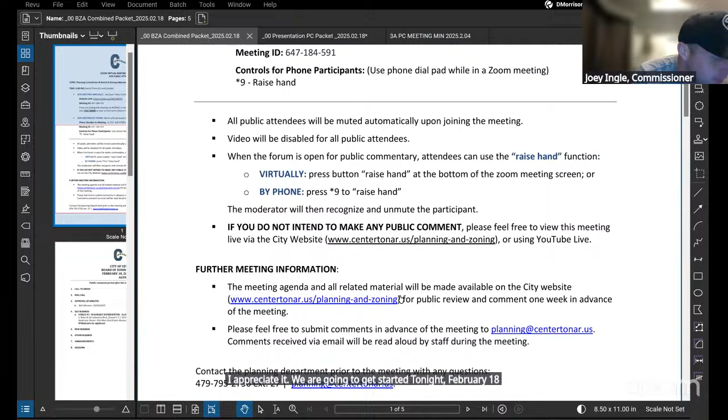We are going to get started tonight, February 18th, with a Board of Zoning Adjustment meeting. I'm going to call that to order, and if we could start with the roll call.

Craig Langford, here. Joey Ingle, here. Devin Murphy. Brandon Swoboda, here. Tony Davis, here. Ben Lewis, here. John Sessoms, I'm here. And Jeff Seyfarth is not here tonight. Did I call everyone? We're good, I believe so. Thank you, okay.

Tonight's only item is variance 2501. We're revisiting the Walmart Supercenter parking space reduction from 786 to 769. And if y'all can remind me, did we table this last time?

Yes, we tabled that. Joey, do you want to approve the minutes for the last meeting? I motion to approve the minutes from last meeting, BZA February 25th. Second. Got a motion and a second. I also motion to resurface and untable variance 2501 Walmart Supercenter.

Well, hold on one second, John, let me ask a question before we do that. It says it's withdrawn, is that correct? Yes, it's withdrawn. Oh okay, all right, then we'll leave it where it's at then. No need. Okay, so with that, no new business, no other business, no announcements for the BZA.

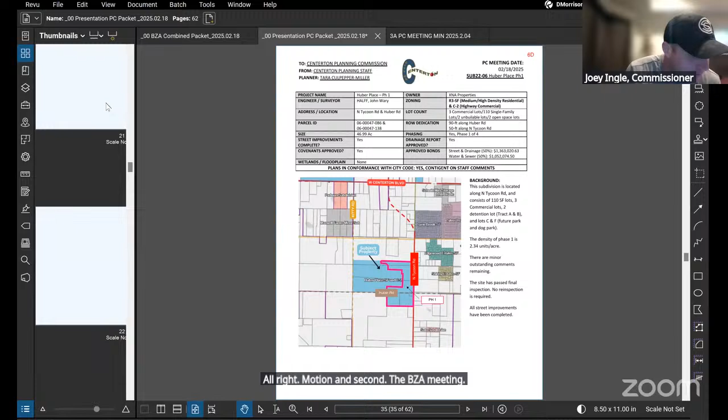I guess with that, I'll take a motion to adjourn. Motion to adjourn. Second. All right, motion and a second, the BZA meeting is now adjourned. We're gonna roll right into the planning commission meeting for February 18th.

I'm gonna start with a roll call.

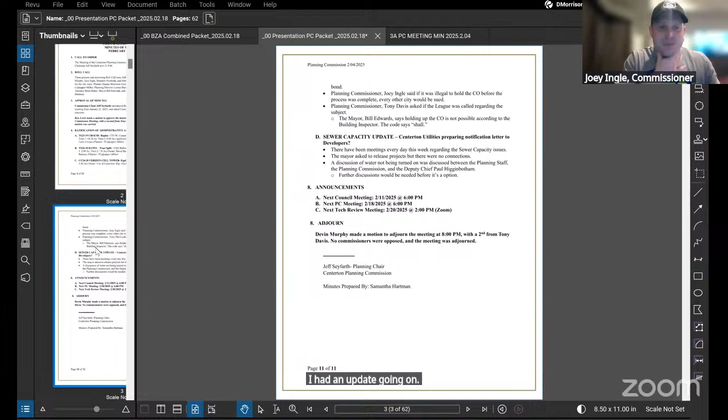If I could interrupt for a minute, Devin's now on too. Awesome, thanks for joining. I had an update going on. Of course, we haven't had a Zoom call in a couple years.

All right, Devin, we're on item 4 on the planning commission agenda. The BZA item was withdrawn. So number 4 is the ratification of administrative approvals. There's a tract split 2412 steel replat on Seba and Main.

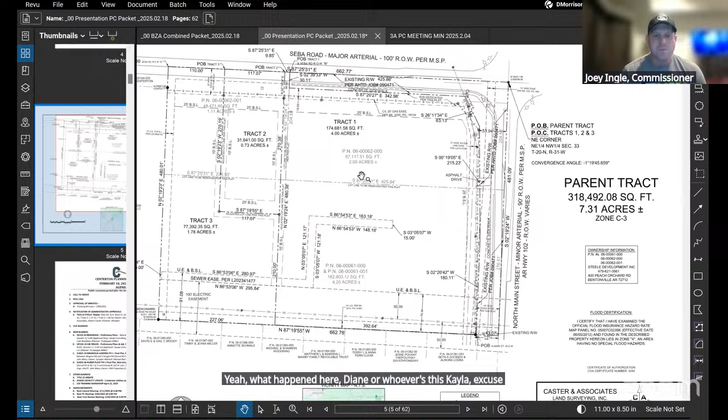What happened here, Diane, or whoever's this is? Kayla, excuse me. So there was a tract split last year that ended up being withdrawn after the gas station that was going to go on this corner got withdrawn. So now they're just replatting it into 3 separate lots and dedicating right of way. Okay.

Great, if anybody has any questions, I'd like to hear those. If not, entertain a motion to approve the admin approval. John: I motion to approve the admin approvals as prescribed. Devin: second. Awesome, thank you all.

No old business, so we're moving to item 6, new business. The first is A, Development 2410 Bradshaw, preliminary plans. Looks like it's a new building at 840 East Centerton Boulevard, and Swope Consulting is the applicant. Phil or anybody else, are you on?

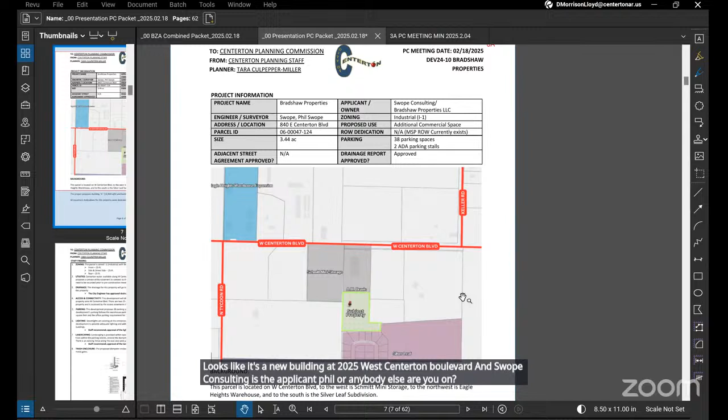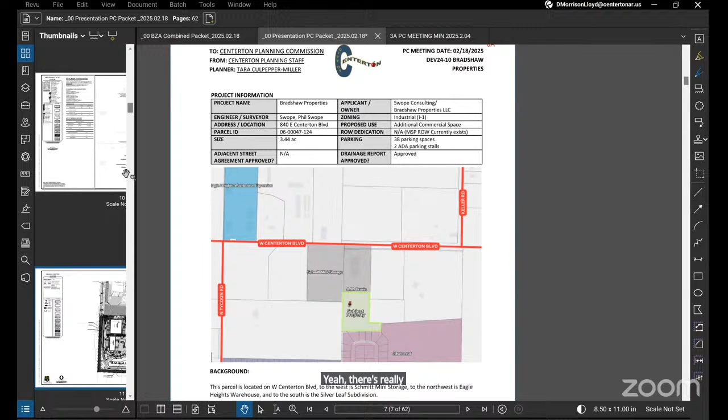Yes sir, can you hear me? Yes sir, can you tell us a little bit about what we got tonight? Yeah, this has been brought as 2 separate projects. The project that's coming up later will be an expansion to the existing building, but this is additional land to the south that we've split out separately.

There's 2 buildings that are proposed. There'll be extensions of the drive aisles on both sides of the buildings and parking. There's also an outdoor truck dock that's planned. Detention is expected south of the development, and we've got a small lift station that's going to get sewer over through Silverleaf that's been designed and approved through Malcolm.

All right, thank you, Phil. Let's see here, this is Terrace. Tara, you on here to tell us a little bit about it? Yes, I do apologize if you can hear my dogs drinking water, they decided right now was a good time for it. Oh, you're good, I got babies screaming in the background.

So just like Phil said, you will see this property twice. For this property, they are requesting 2 buildings in the south property. This property was recently approved on a tract split to divide the property into 2 separate sections, so the north side's commercial and the south side is industrial. This is on 3.44 acres. The applicant is Swope and Bradshaw Properties. The current zoning is I1.

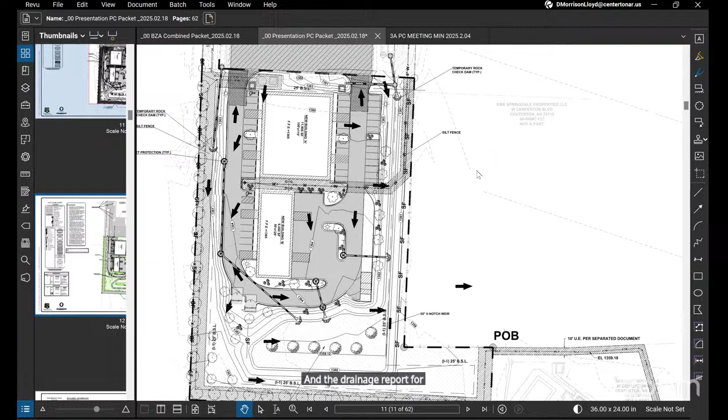They're proposing additional commercial spaces, and the right-of-way already currently exists on this property because of the existing building. The parking that they're proposing is 38 parking spaces and 2 ADA parking stalls, and the drainage report for this has been approved. This parcel is located on West Centerton Boulevard. To the west is the Schmidt Mini Storage, to the northwest is the Eagle Heights Warehouse, and to the south is the Silverleaf Subdivision.

This project proposes a building A, which is 11,900 square feet, and a building B, which is 6,000 square feet. All easement dedications for this property were dedicated with tract split 2406, minus a 10-foot private utility easement. They have been notified that they will need to dedicate that prior to construction with Silverleaf.

This parcel is currently zoned I-1 with the setbacks as listed below. Centerton Water is available along West Centerton Boulevard.

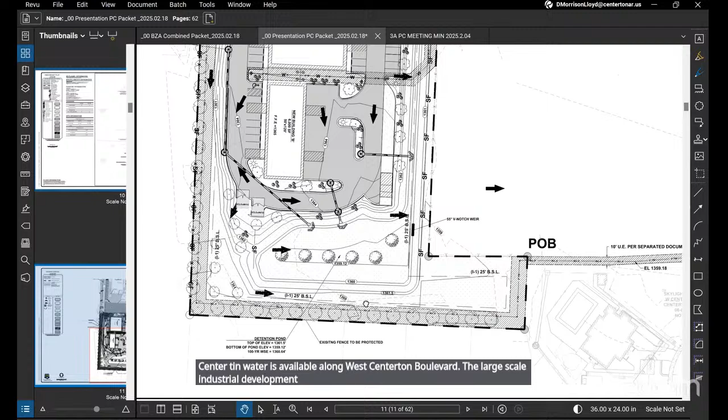The large-scale industrial development proposes a private utility easement to connect to the Silverleaf subdivision sanitary sewer that will need to be recorded prior to their pre-construction meeting. The drainage for this property will go to the pond proposed on the south side of the property.

This development will share the existing entrance with the northern property onto West Centerton Boulevard. There are two 25-foot access easements proposed on the north property, accessed by the access easements dedicated with tract split 2406.

This development proposes 38 parking stalls with 2 ADA parking stalls. It follows the warehouse parking requirement of 1 parking space per 500 square feet, and the office parking requirement of 1 parking space per 300 square feet.

Streetlights exist at the entrances of the north property and every 300 feet within the development, to provide adequate lighting, and additional wall packs are proposed with the 2 buildings. Landscaping is provided within the open spaces throughout the development.

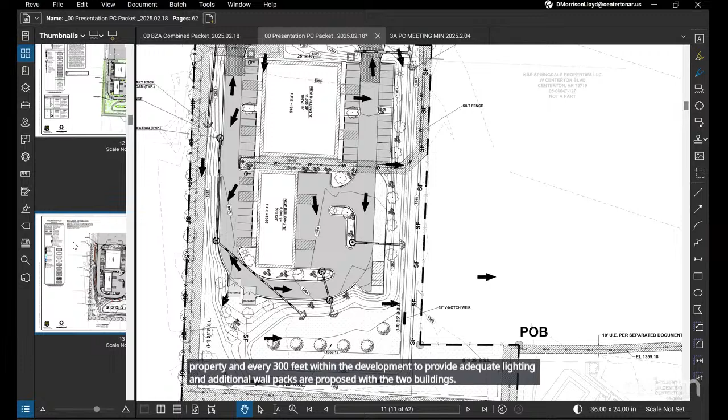This includes trees within the parking islands, around the dumpster enclosure, and around the proposed pond. There is an existing fence along the east and west property lines. The proposed dumpster enclosure is a concrete block enclosure with metal gates.

Planning does have minor comments regarding labeling, and we are requesting approval of the preliminary plans, landscaping plan, and the lighting plan. That's all I've got.

Awesome, thank you. Quick question - I see the trees shown. I was trying to figure out if those are trees to the east. And another question: what sort of screening is required between commercial and industrial at the front?

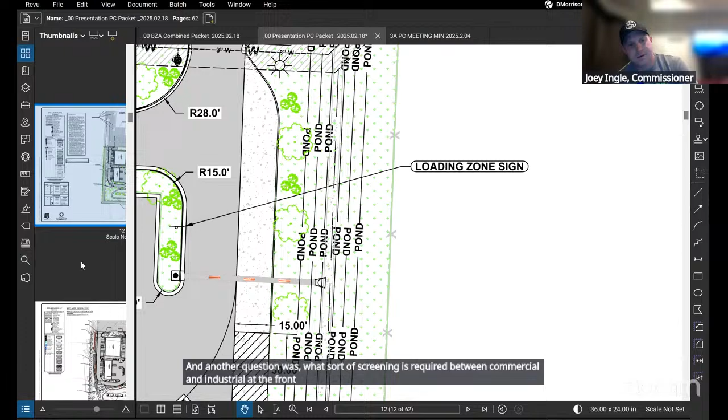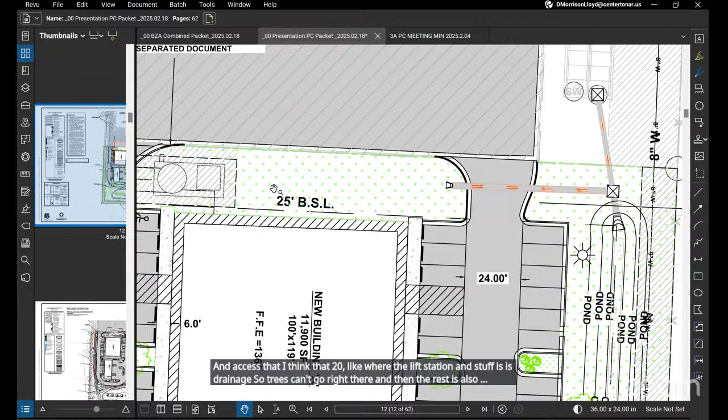I'm not sure - they're sharing an access, and where the lift station is, there's drainage, so trees can't go right there, and the rest is also drainage. I'm not sure with this because it's all one, the road and everything connects, what the requirements would be. But I can look into it. Okay, if you do that - it looks like up on the north by the lift station, it just drains to the east, so I think some things can go there.

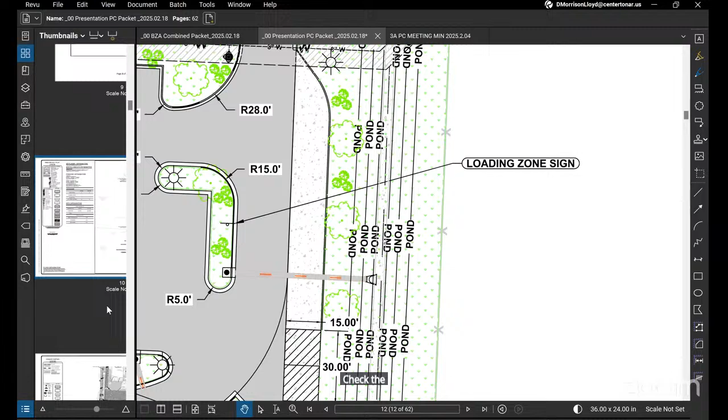I think potentially just hollies are called out on the east. If we have anything more than a fence requirement - I don't know the zoning to the east, is that commercial? I believe... I'd say just check the screening requirements. Agriculture - oh, it's ag, okay. Check the screening requirements for us, and if we need to add anything, let's make sure we meet code on that.

I noticed on the lighting plan there's some light bleed off the property on the west side, so we might have to add some cutoffs or something to those light poles. But that's another thing to take a look at, more at the northwest corner at the top - you've got almost a foot-candle coming over, like 0.9.

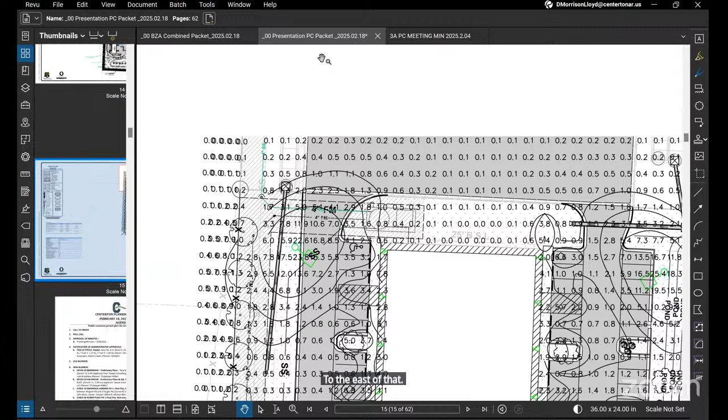To the east of that, it's either storage units or the concrete batch plant, so that's fine, and the uses match up. I just want to make sure we meet code on what we call for screening.

It was more of a question to the north, because I know they're getting developed together, but they are separate parcels, correct? Yeah. Well, I was just saying for the light bleed, I wasn't worried about that - the east is fine, it's the west. I'm saying the west light bleed, I'm not worried about at all.

Well, I am, because it's in the code and they need to cut it off at the property line. It's what we should be making everybody do.

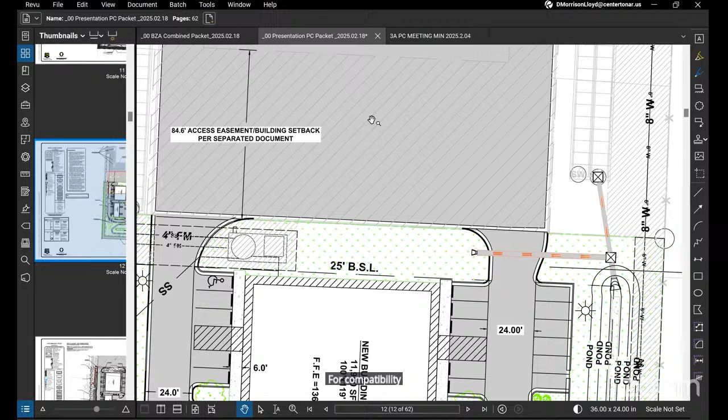For compatibility standards, there isn't anything specific between commercial and industrial - it's more commercial versus residential. Okay, residential, yeah. And these, for the most part, are going to be the same type of thing. I mean, Bravis is its own standalone business, but it's still kind of a flex space type use. Sure, which still leaves it open - anything could go in there.

Kevin, does anybody have anything else to add? Well, Joey, I think - okay, go ahead.

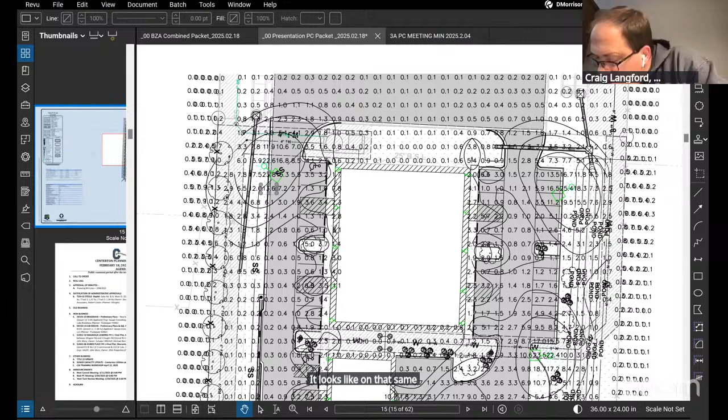I just want to say, Joey, on the light - did you say just the west, or east as well? I thought the east was okay. I backed out of that plan - it looks like on that same latitude across, there's some bleed as well. Oh yeah, so east I see, and west. It's there, certainly a lot less, but yeah, I think we should check that out.

Yeah, kind of right where she's at. Cool, thanks for pointing that out, Craig.

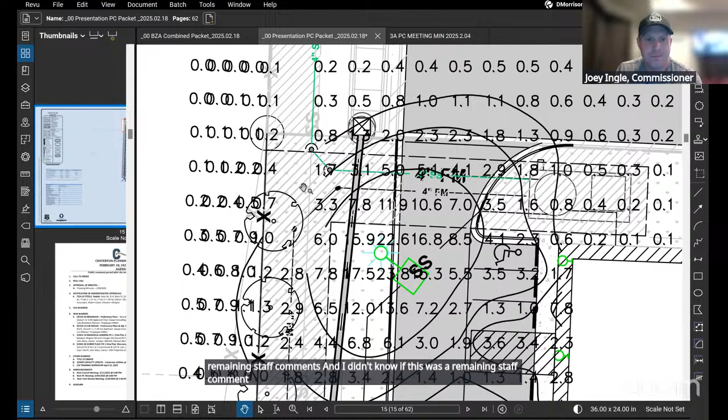Brandon, did you have something? I think my question was, when you say we should check it out, what does that mean for the team in regards to our voting on this? I would propose we approve it contingent upon the remaining staff comments. I didn't know if this was a remaining staff comment, but I do think it should be. By us pointing it out, Phil can ask his MEP to look at what we can do to cut that light off at least at the property line.

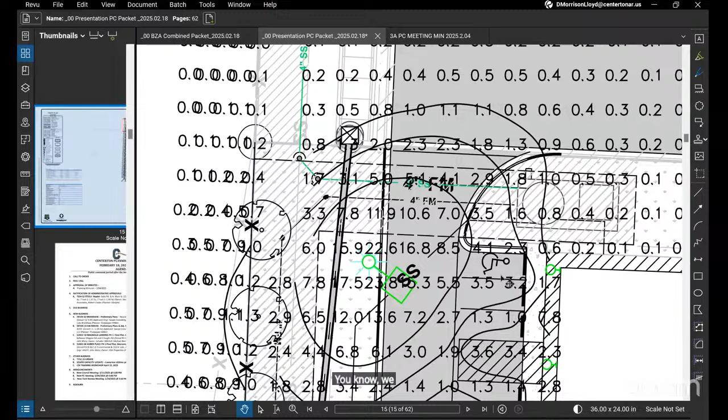Yeah, we don't have any problem with that at all. Brandon, are you good with that? Yep, I don't think they should have to come back just for that. Agreed. Okay, great. If anybody has anything else, please speak up.

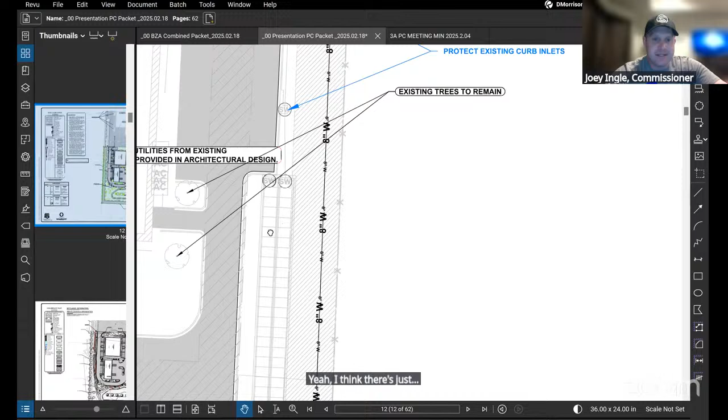If not, I'd entertain a motion on Development 2410, on the landscaping plan. Joey, did you have a comment earlier about that? I was trying to study it a little bit more. I think there's just shrubs to the east. I was making sure that between our different zonings, the screening requirement was met that we call out. And then same on the north side, even though this is getting developed all at one time, I believe it's a separate parcel, so it could sell and be developed separately. A different owner could buy the south half. I just think it's important we meet the code so we're consistent.

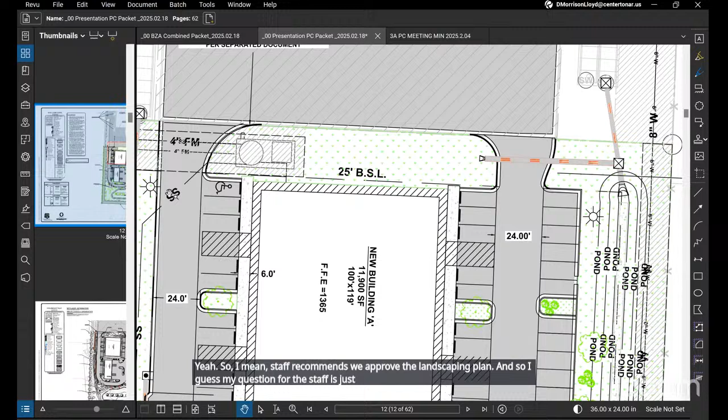So staff recommends we approve the landscaping plan. My question for staff is, have they met all the requirements for landscaping? I'm assuming yes, which is why you're saying it should be approved. Right now in the code, the landscaping requirements are pretty minimal, as you guys know. Joey's asking about compatibility standards between commercial and industrial, which isn't required by the code. So if they need additional landscaping, it's at your guys' requirement.

And Alan, with that area here being drainage, could they put anything here? I know there's a lift station. It grades the drain, it's not really a swale or anything like that, it's just generally draining to the east. And the properties on either side for future development, you said right now they're ag, is that correct? The west is developed and it's industrial. Okay, yeah, it's a storage unit facility. And the other side is industrial too, or did I hear the word agriculture somewhere in the conversation?

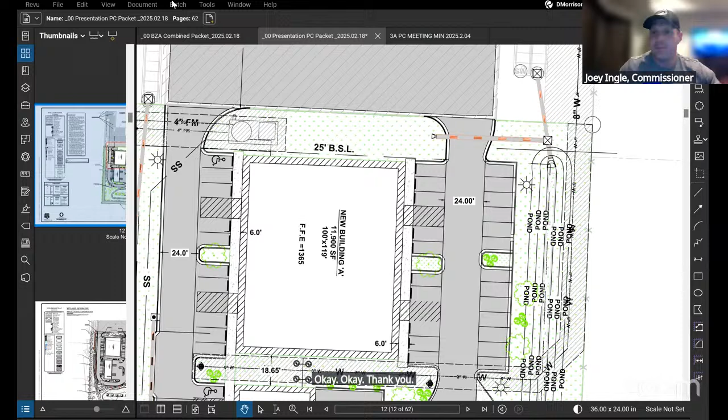I believe it is still ag, if somebody else wants to check so I don't show something dumb on my screen. I'm checking. And is that the future plan? Do we have a part of that property to the east that's actually commercial? Okay. So the property that it lines up with is C2. Okay, thank you. And yes, Brandon, that is correct. There have already been some trees cleaned up over there. There's white oaks on that east side. Yeah.

I'm good with it. Awesome. Okay, you good enough to make a motion? Yeah. Somebody is. Alan, I've still got my streak, Alan. Let's go.

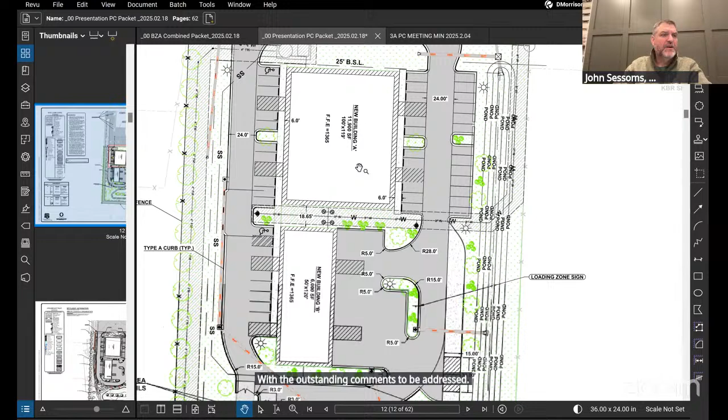Well, if there's no further comments, then this is Craig. I'll make a motion to approve Development 2410 with the outstanding comments to be addressed. This is John, I'll second. Sorry, found the mute button. Awesome, thank you all, you got Brandon off the hook there. Thank you, Phil, that one's been approved.

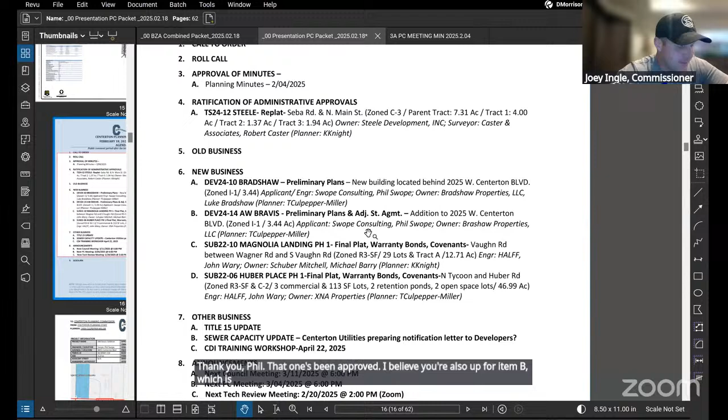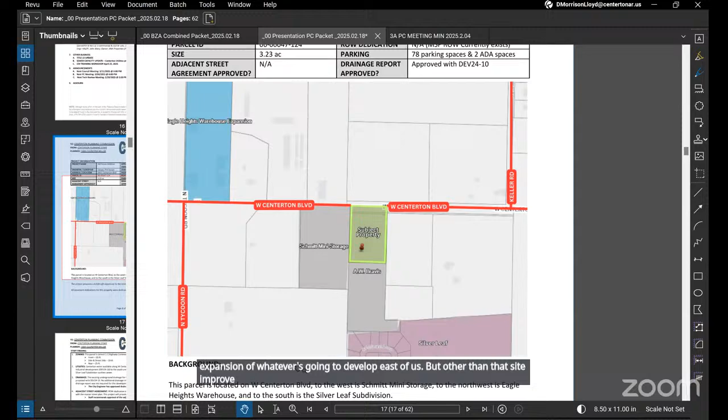I believe you're also up for item B, which is Development 2414. Yes, sir. All right, let's give Diane or whoever's running a chance to swap over here. Okay, go ahead, Phil. Yeah, so this is really no more than just an add-on to the building on the south end of the southmost building on that north tract. I think we have a driveway extension that goes to the east to the future expansion of whatever's going to develop east of us, but other than that site improvement, all the other improvements are really to the south of us. So just more or less a building expansion? That's right, yes sir.

Awesome. Let's see here. This is Tara's again. You want to give us the rundown?

Yes sir. Like Phil said, this is going to be that north side of that property, which is zoned C2. The existing building there is the Bravis building, or they're a tenant in that building. They are doing an expansion to the south side of the property. The north property is 3.23 acres, currently zoned highway commercial.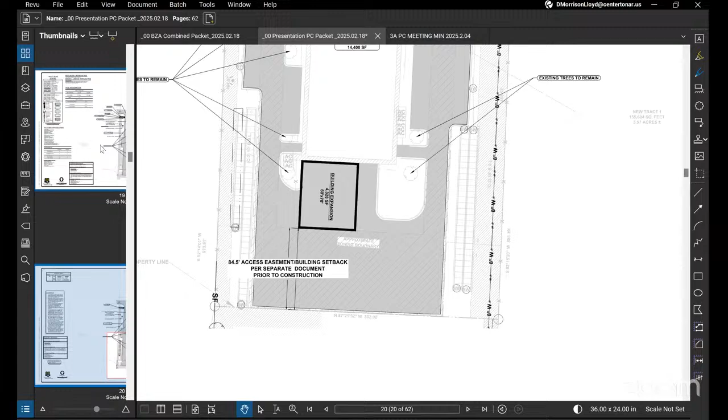They are proposing additional commercial space to the south. Right of way currently exists. They have 78 existing parking spaces and 2 ADA spaces, so they already meet the requirements per square footage - they had much more parking than needed when they originally built the building. The drainage report for this has been approved with Development 2410, which is that south property we just discussed, so this is the same deal.

This one's located on West Centerton Boulevard. To the west is the Schmidt Mini Storage, to the northwest is the Eagle Heights warehouse, and to the south is the Silverleaf subdivision. This project is proposing 4,328 square feet of expansion to an existing 14,400 square foot building.

The addition, along with the large-scale industrial development to the south, are proposing a private easement to connect to the Silverleaf subdivision sanitary sewer system. Originally this building was on septic. They are getting rid of septic for the building, and proposing to have the building to the north and the industrial buildings to the south connected to sanitary sewer.

The existing underground drainage for this property will be tied to the pond proposed with Development 2410. No additional drainage improvements are needed at this time, and the drainage report was not required for this development as it was already addressed in the south property and approved. Right-of-way is not required as right-of-way already exists in compliance with the master street plan.

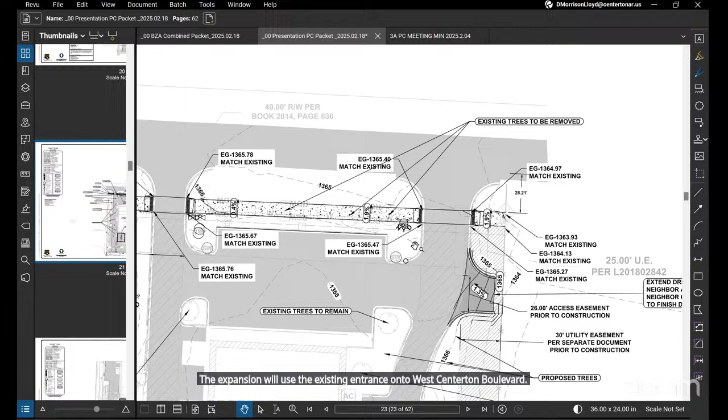This project will, however, be providing a 10-foot sidewalk along West Centerton Boulevard. The expansion will use the existing entrance onto West Centerton Boulevard. There are two 25-foot access easements proposed to the east and west of the property that have been dedicated with tract split 2406. Streetlights are existing at the entrances and every 300 feet, and they are proposing additional wall packs with this addition.

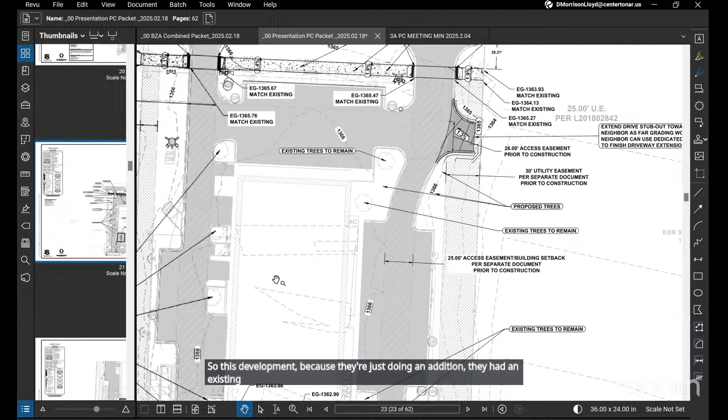Landscaping is provided within the open spaces throughout the development, already existing in parking lot islands. Trees along the front of West Centerton Boulevard will be relocated with the addition of the 10-foot sidewalk - originally there were about 6 trees where that sidewalk is going, and they'll relocate those around the development. The plans show where they're relocating them. There's also an existing fence along the east and west property lines. Since this development is just doing an addition, they had an existing trash enclosure. We asked that they update it from wood to a block dumpster, so they will be making that upgrade with this expansion as well.

We are requesting approval of the preliminary landscape and lighting plan. Let me know if you have any questions. Thank you. Does anybody have any questions?

Looking at it, I got one question. You said 6 trees, but I only count 3 new ones.

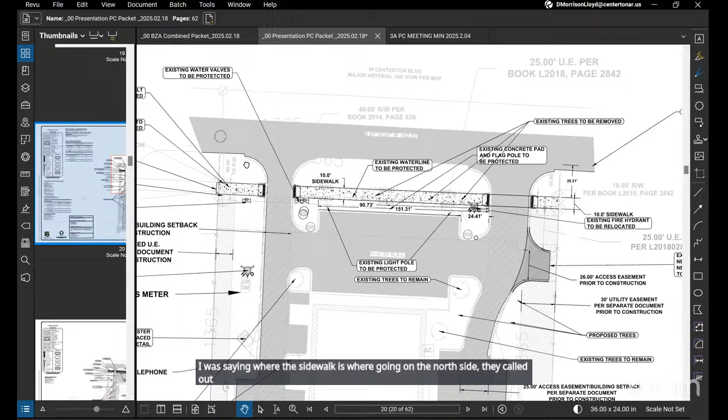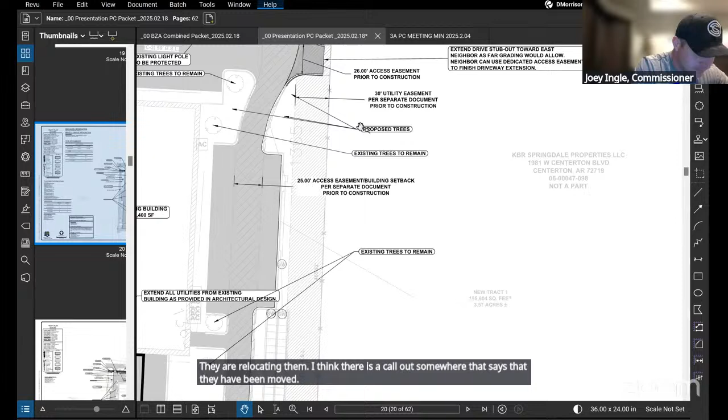I was saying where the sidewalk is going on the north side, they called out where they have existing trees. I didn't know the exact number because I was just reading the PC report, but they do have existing trees that say to be removed, though I think they are relocating them. I think there is a call-out somewhere that says they have been moved - I'm just trying to figure out where. But I did discuss it with Phil that those trees will need to be relocated, so they'll be spread out in the development as well. They already have existing landscaping from when the original building was there, so there are islands and everything like that.

I don't have any other questions. Does anybody else? If not, I would entertain a motion.

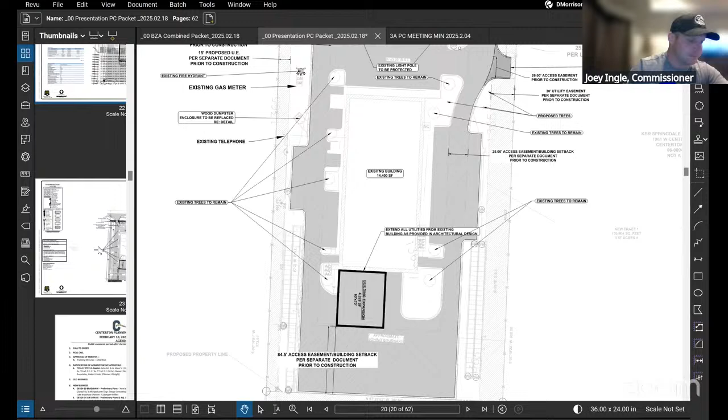Motion to approve development 2414. Second, Devin. Motion and a second. Thank you, Phil. Thank you, appreciate it.

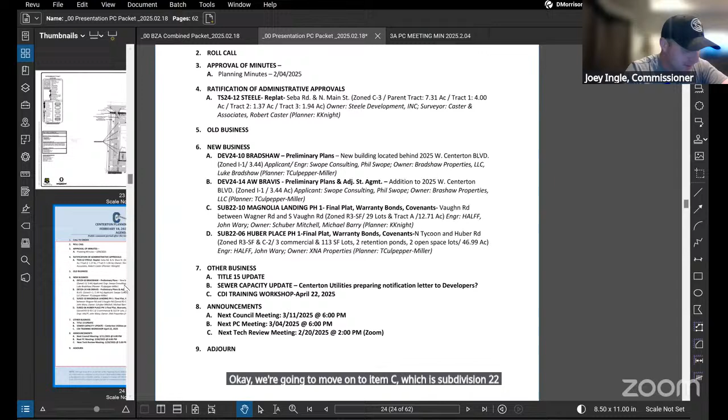Okay, we're going to move on to item C, which is subdivision 2210, Magnolia Landing, phase 1, final plat, warranty bonds and covenants.

Michael Barry or another representative from Schuber Mitchell, are you available, or Mr. Barry? It is Justin Higgins. I finally found the person with their hand.

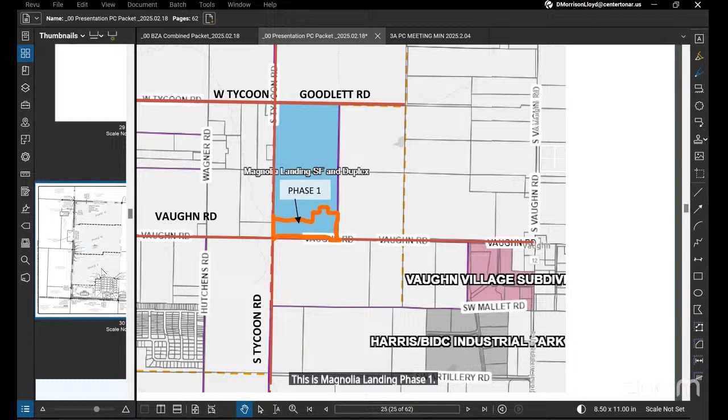Good evening everybody, I'm Dustin Higgins with HALFF, representing this project today. This is Magnolia Landing Phase 1, consisting of 29 single-family lots and a separate lot for detention. The remaining property will be platted as Tract B and developed as phases 2, 3, and 4.

We had some minor comments that we needed to address on the plat. We got that sent back into the city. I believe they have everything they need to review, they just need the time to review it. This is the smaller phase of this subdivision, pretty straightforward, but if anybody has any questions, just let me know.

Awesome, thank you Dustin. Yes sir, let's see here, this one is Miss Kayla.

This subdivision is located along Vaughn Road and consists of 29 single-family lots, 1 detention lot, and Tract B, which includes phases 2 through 4 of the subdivision. The density of phase 1 is 1.94 units. The majority of this phase is the giant pond.

There are minor outstanding comments remaining. As Dustin said, I believe they've turned everything in, it just needs to be reviewed, and the crazy snowstorm does not help. The site has passed final inspection, no re-inspection is required, and all of their street improvements have been completed.

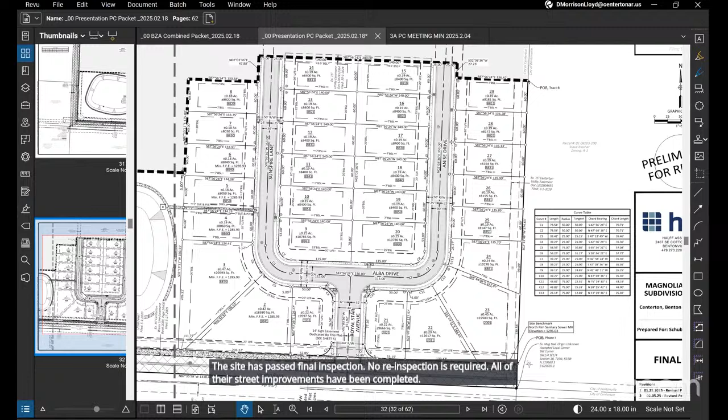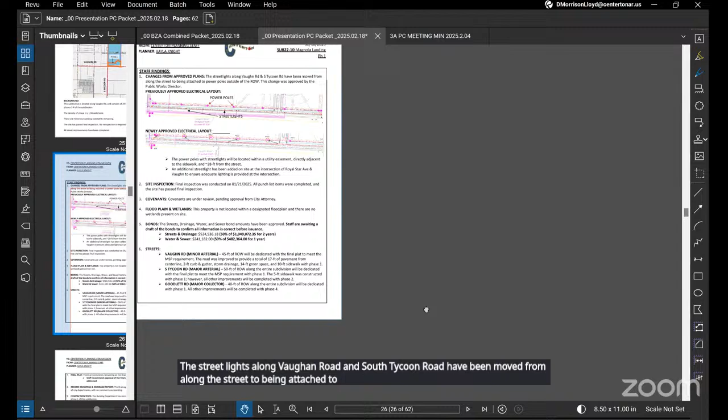There have been a few changes from the approved plans that you guys previously saw. The streetlights along Vaughn Road and South Tycoon Road have been moved from along the street to being attached to power poles outside of the right-of-way, and that change was approved by the Public Works Director. The power poles with the streetlights will be located within a utility easement directly adjacent to the sidewalk, about 28 feet from the street.

An additional streetlight has been added at the intersection of Royal Star Avenue and Vaughn Road to ensure adequate lighting at that intersection, and they have provided documents to show that that will be added.

It's passed its final site inspection and all punch list items were complete. The covenants are under review pending approval from the city attorney. I believe those are just about ready to be approved, we were just waiting on a minor typo to be fixed. Those came in this afternoon, so we just have to double check that they fixed the typo.

This property is not located within a designated floodplain and there are no wetlands present on site. The streets, drainage, water, and sewer bond amounts have been approved and are listed in your packet for you, because I'll butcher a number that long.

They did just submit their draft bonds, I believe they sent them yesterday and then again today, just to make sure we have them. So we just need to double check that all the information is correct on them for them to be issued.

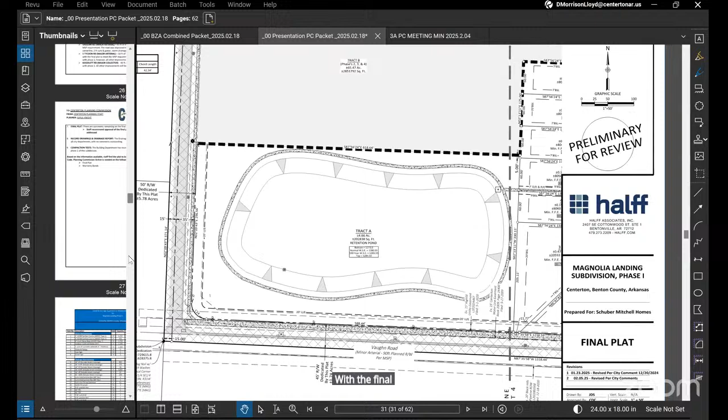For the streets, this is located along Vaughn Road, which is a minor arterial. They're dedicating 45 feet of right-of-way with the final plat to meet the master street plan requirements. The road was improved to provide a total of 17 feet of pavement from the center line, 2 feet of curb and gutter, storm drainage, a 14-foot green space, and a 10-foot sidewalk with phase 1.

South Tycoon, which is a major arterial, they're dedicating 50 feet of right-of-way along the entire subdivision with this final plat. They constructed the 5-foot sidewalk, but the rest of the improvements to this road will be completed with phase 2.

Goodlett Road is a major collector and they're dedicating 40 feet of right-of-way along the entire subdivision with this phase 1 plat. All other improvements will be completed with phase 4.

There are some minor comments remaining on the final plat, which once again I believe they've resubmitted. It's just had to do with some labeling and fixing a note. So we recommend approval of the final plat contingent on those outstanding comments being addressed.

The record drainage report and record drawings have been approved by all city departments with no comments outstanding, and the building department has received and approved all required compaction tests for phase 1 of this subdivision. Let me know if you have any questions.

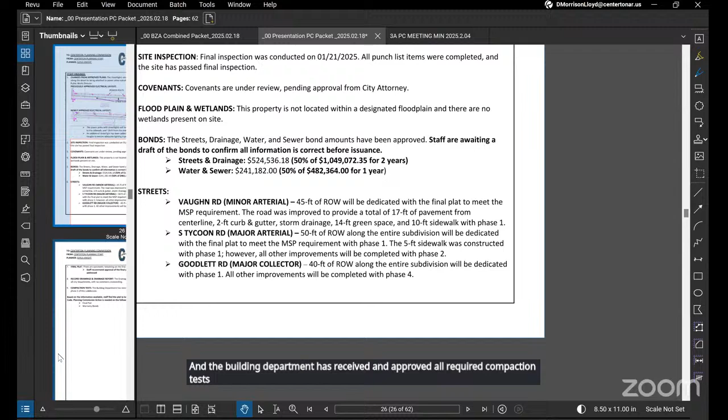Awesome, sounds like it went well. Thank you, Dustin, thank you contractor and staff for getting all that lined out. We appreciate it. If anybody has any questions, please speak up. If not, it sounds like we're ready to recommend approval to council for the final plat, the bonds, and the covenants.

This is Craig, I'll make a motion to approve subdivision 2210, Magnolia Landing phase 1 final plat, warranty bonds, and covenants, with any outstanding comments to be addressed. This is Tony, I'll second. Awesome, we got a motion and a second. Thank you, Dustin, I appreciate it.

And everybody, just as a note, they do have a special council meeting scheduled Thursday to approve this with city council.

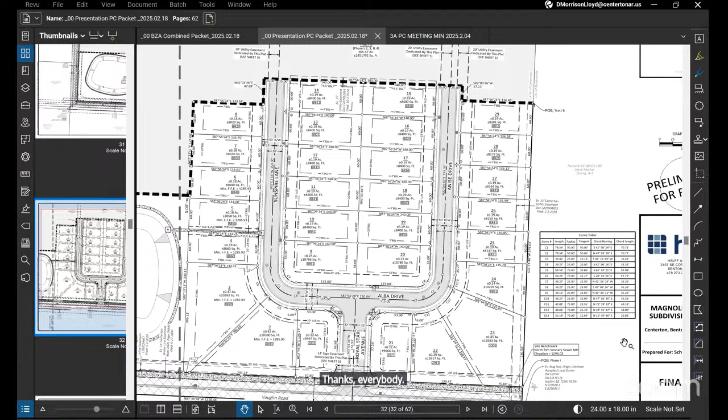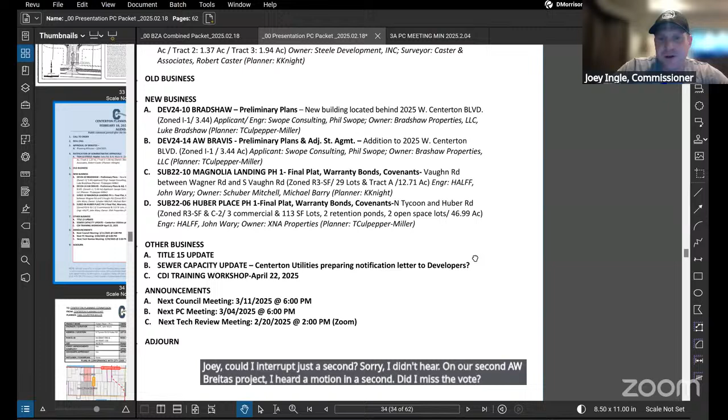All right, let's go to item D. Yep, Joey, could I interrupt just a second? Sorry, I didn't hear a vote on our second AW Bravis project. I heard a motion and a second, did I miss the vote? There's no vote unless it's a public hearing, Phil. Oh, I'm sorry, okay, yeah, you're good. We can vote though if you want us to. I vote to deny. No, Phil, you're good. Okay, thank you, appreciate it.

All right, moving on to D, subdivision 2206, Huber Place, phase 1. Looks like the same deal: final plat, bonds, and covenants.

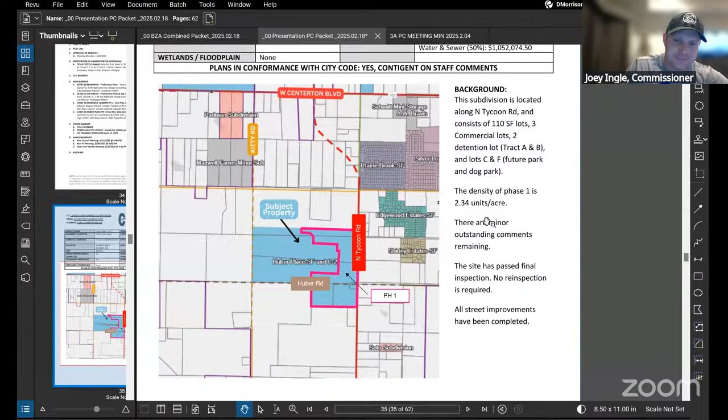Dustin, you doing this one too? I think John was gonna do this one, but if he's unable to, I can. There he is, this is John Wary. Can you hear me? Yes sir, we can hear you. Okay thank you, I'm trying to remember how to use Zoom. I know, right?

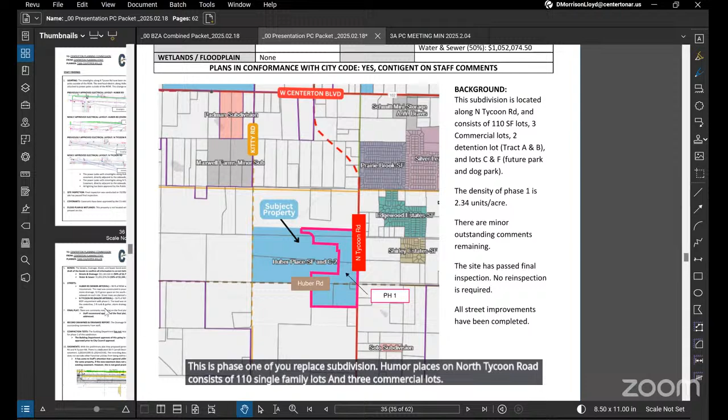Okay, this is John Wary with Halff, I'm going to represent the developer on this project. This is phase 1 of Huber Place subdivision. Huber Place, on North Tycoon Road, consists of 110 single-family lots, 3 commercial lots, and 6 tracts. The tracts being 2 detention ponds, a future dog park, a future park, and one lot on the very north end that's an emergency turnaround until that road extends to the north, until Boxwood extends to the north. The 6th tract is the remaining subdivision, which will be phases 2, 3, and 4.

All site construction items have been addressed. There are no punch items remaining, and there are a few remaining items on the final plat and record drawings. Those documents were delivered to staff today — I'm sorry, I tried to deliver them yesterday and today, but they were emailed to staff today. So with those documents, everything should be addressed.

The draft bonds have been reviewed, and I think probably the only outstanding item are the compaction tests. I think there was some confusion between the contractor and the building inspector on the compaction test. What I understand is they provided compaction tests on all lots that received fill, and I think the building inspector is looking for compaction tests on all lots. So the building inspector said as long as he has those compaction tests before the plat is filed of record, then he'll be okay.

Yeah, go ahead John. I was going to say the contractor is trying to find some weather that will permit him to get some compaction tests on some lots. So Robbie wants proof that every lot that has fill has a compaction test, and if one was not required because it didn't receive fill, you just need to put on there N/A or however — anything that's not remaining as virgin soil is what he wants. This one pretty much had vehicles tracking over everything for the majority of it, so I think he's looking for tests on all of them, not just the ones with fill, because the vehicles compacted things down or spread material across and flattened it.

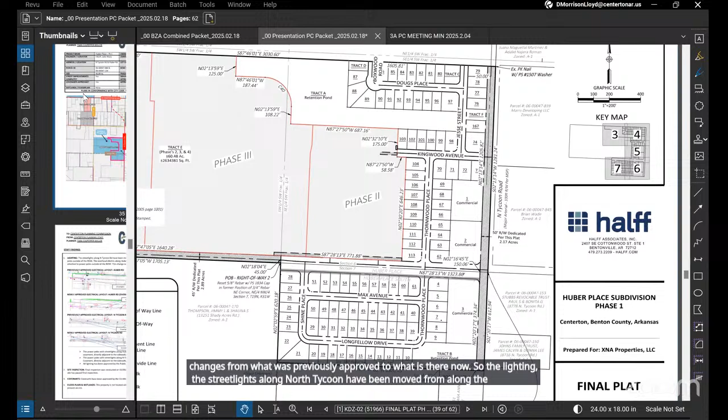So just like Kayla mentioned with Magnolia Landing, there have been some changes from what was previously approved to what is there now. The street lights along North Tycoon have been moved from along the street inside the right-of-way to being attached to power poles outside of the right-of-way. The overhead electric along Huber Road has also been moved outside of the right-of-way. This change was approved by the Public Works Director, and there are some images there for you guys to look at.

The power poles with streetlights along Huber will be located within a Carroll Electric easement directly adjacent to the sidewalk and are 44 feet from the street. The power poles with streetlights along North Tycoon will also be located within a Carroll Electric easement directly adjacent to the sidewalk and 44 feet from the street. All the lighting was approved by the Public Works Director.

The final site inspection was conducted January 9th. All the punch list items were complete and the site has passed the final inspection. We did receive approval on the covenants from the city attorney. This property is not located within a designated floodplain or wetlands.

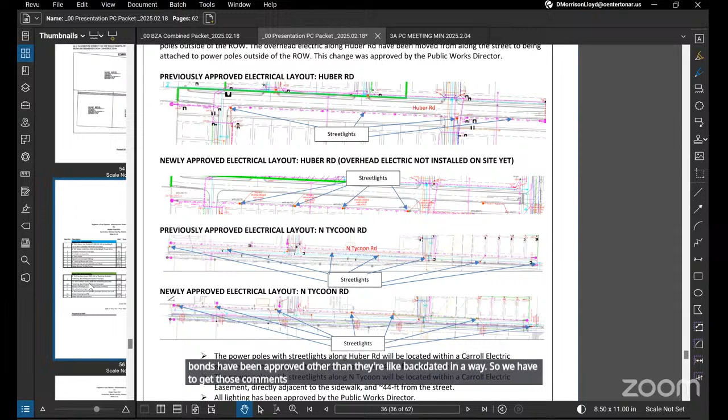The streets, drainage, water, and sewer bond estimates have been approved. Staff are reviewing the draft of the bonds to confirm all information is correct before issuance, but the most recent information I got was that the draft bonds have been approved, other than they're backdated in a way. So we have to get those comments to the engineer. That came to fruition on Friday, so those will be given to the engineer when we get back in the office.

Huber Road is a minor arterial with 90 feet of right of way because they built out the whole road, and it will be dedicated with the final plat to meet the MSP requirement. The road was constructed to provide a total of 38 feet of pavement, 2 feet of curb and gutter, storm drainage, 32 feet of green space to the south and 5 feet of green space on the north, and 6 feet of sidewalk on each side.

The street trees are planted along the south side within the green space. North Tycoon is a major arterial with 50 feet of right of way that will be dedicated with the final plat. The road was improved to provide a total of 16 feet of pavement from the center line, 2 feet of curb and gutter, storm drainage, 28 feet of green space, street trees, and a 6-foot sidewalk on each side.

There are remaining comments on the final plat regarding labeling and missing information, but we did receive resubmittals of those today, same with the record drawings. The drainage report has been approved, and the record drawings do still have outstanding comments, but they did resubmit.

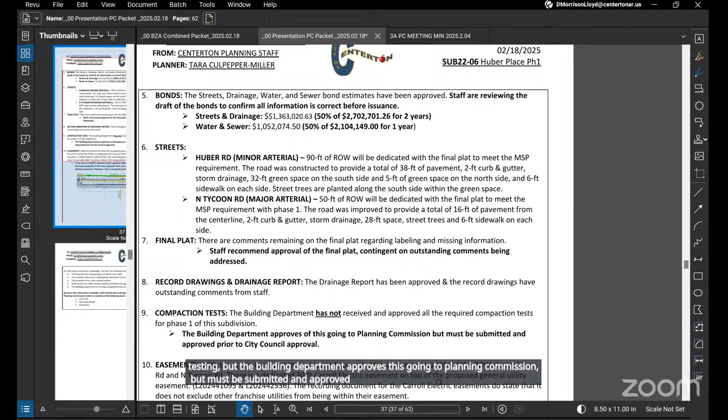The building department has not received and approved all the required compaction testing, but the building department approves this going to planning commission, though it must be submitted and approved prior to city council approval. But I think that has been updated, because they're going to try and go to the special city council meeting also on Thursday. I think Robbie said it was okay that they went to city council as long as the plat didn't get recorded before he had them.

With the preliminary plat, they proposed a general utility easement outside of the right-of-way along Huber Road and North Tycoon. There is a dedicated 30-foot Carroll Electric easement on top of the proposed general utility easement, and I added the record information for you guys there.

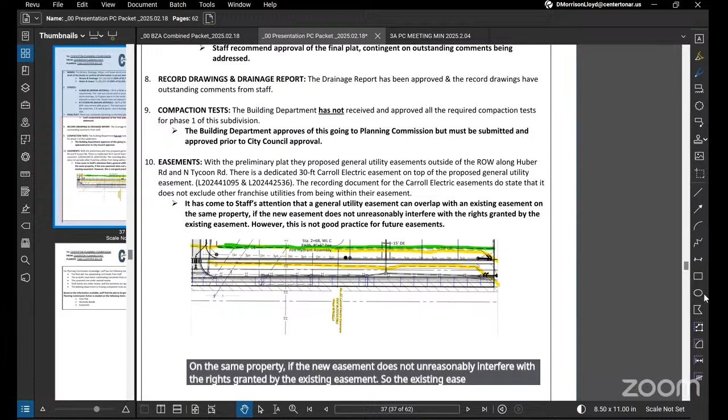The recording document for the Carroll Electric easement does state that it does not exclude other franchise utilities from being within their easement. It's come to staff's attention that a general utility easement can overlap with an existing easement on the same property if the new easement does not unreasonably interfere with the rights granted by the existing easement. So the existing easement we're talking about is a dedicated Carroll Electric easement along Huber and along North Tycoon. But because of the note they added within the deed for both of them, we can overlap easements.

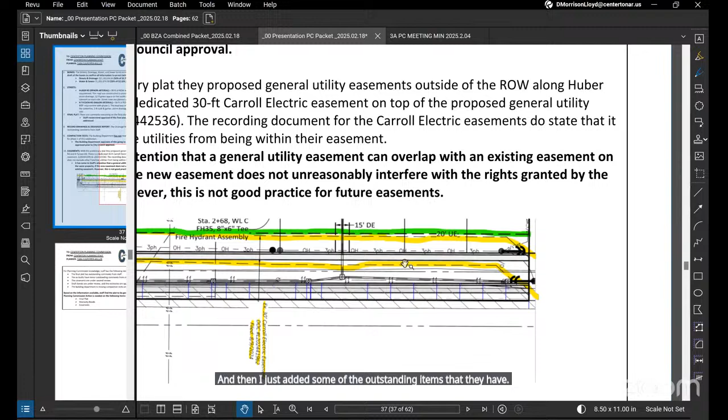And then I just added some of the outstanding items that they have. If you guys have any questions, let me know. Excellent, thank you. Guys, do you have any comments or questions on this one? If not, I think this is the same situation as last time. Recommend approval for the final plat, warranty bond, and covenants with the remaining comments. So if there's no questions, I would entertain a motion on that.

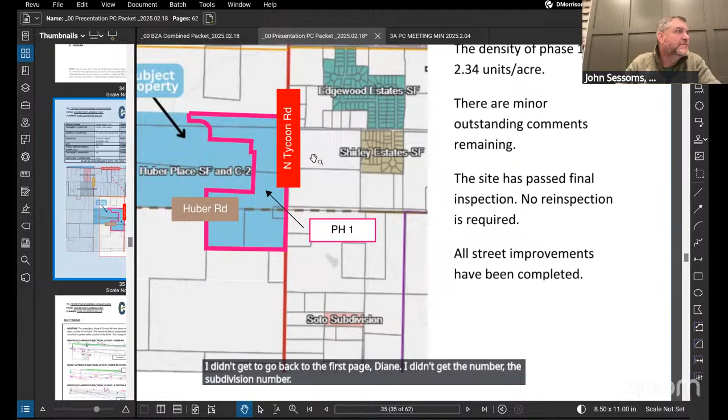I didn't get—can you go back to the first page, Diane? I didn't get the number, the subdivision number. I'll pull it up. Okay, can you see it now?

I motion to approve subdivision 2206 as described. This is Ben, second. Awesome, we got a motion and a second. So that did pass. Thank you, John. Okay, thanks everybody.

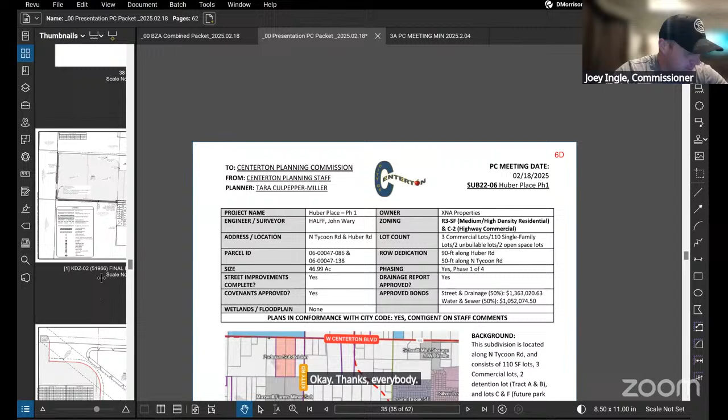Moving forward to item 7, other business. I think these have kind of been holdouts from the last few meetings that we've been having. Does staff want to give us updates on these three items?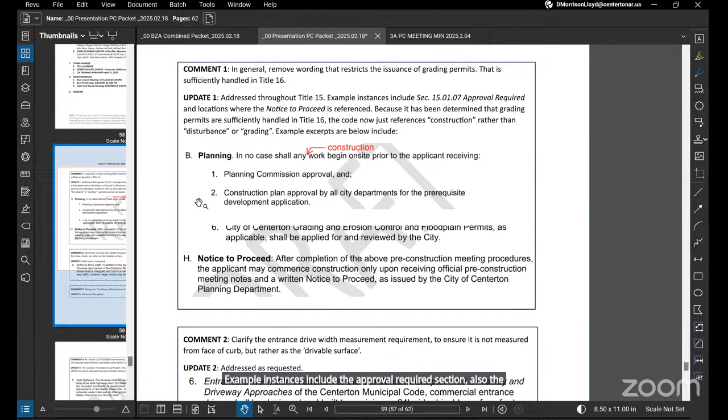This is an update summary for the commission. We've taken the previous comments and revisions document you've all seen, the printout from a few meetings ago, and cleaned it up to show a cleaner, quicker synopsis of where we are on this project. Comment one, you'll remember this: there was a request to remove wording that restricts the issuance of grading permits in Title 15, since that's sufficiently handled in Title 16 regarding grubbing and disturbance. The update is this has been addressed throughout Title 15. Example instances include the approval required section and the notice to proceed, referenced throughout the code—you can see those two examples there, taking away references to disturbance and grading and simplifying it to construction, as discussed.

Okay, and I think, anyone stop me if we need to spend more time on one, or if you have any questions, just jump in. But otherwise, I'll press on to the next one here.

Comment number 2: clarify the entrance drive width requirement, ensuring it's not measured from the face of curb but rather as the drivable surface. This has been addressed as requested. It wasn't a huge item, but it concerns how the 24-foot drivable surface is measured. This has been updated to reflect drivable surface rather than measuring from face of curb, while still allowing staff to require wider widths for commercial drives when needed.

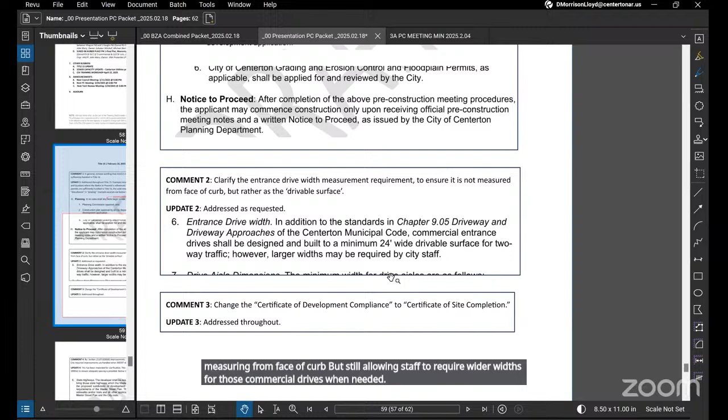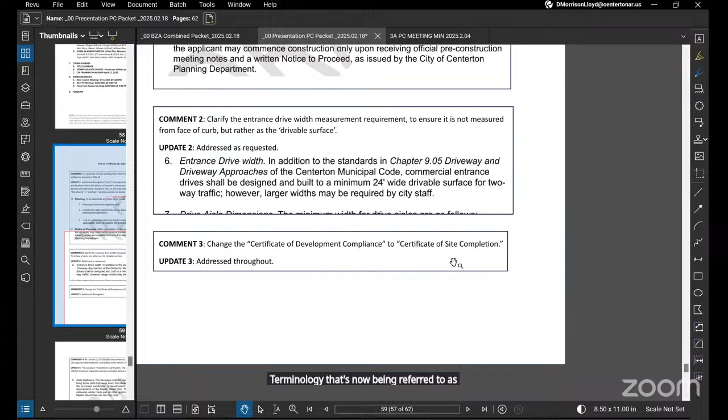Number 3, this is a minor update to the Certificate of Development Compliance terminology, now being referred to as Certificate of Site Completion. That was a request from staff, and it's been addressed throughout.

In the improvement section specific to state highways, there was a need to reword this to better clarify how city-required improvements would be handled when ARDOT does not allow something within the ARDOT right-of-way. So this has been reworded for clarification. It will involve close coordination with Centerton Utilities to ensure adequate spacing is provided. We'll speak more to that in a minute, but you can see on letter B, highlighted, the paragraph that's been updated to better clarify what was being referred to regarding ARDOT's jurisdiction over those state highways.

Derek, this is Laureen. I have a question. Could it also be additional city right of way alongside a state right of way? Because I was thinking, like along 102, when we've acquired additional right of way, there's the state part and then there was our part. Okay, yeah, I think that makes sense.

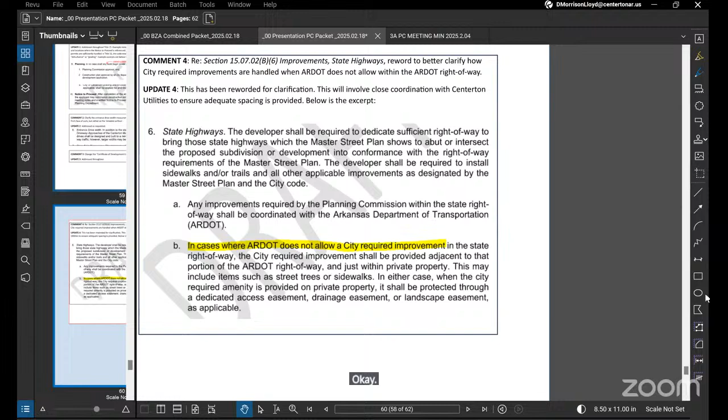All right, number 5. This was a calculation comment, a good comment about how the detention pond landscape items were being calculated, ensuring that it's clear on those bigger ponds, dry ponds that are 30,000 square feet or larger, how those have a slightly different ratio. So now it's bullet pointed into 2 different categories. The one you can see in the first highlight is for 30,000 feet or less ponds, so you're applying a ratio of for every 3,000 square feet.

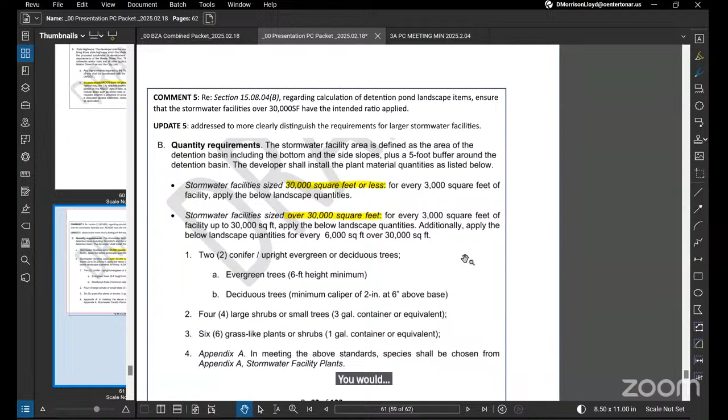You would apply the below numbered 1 through 4. And then if you have a pond that is larger than 30,000 square feet, you would first do that calculation. But so as not to require too many plants on a much larger pond, the ratio becomes lesser. So you're only calculating those items for every 6,000 square feet in those larger ponds.

Number 6, this comment says regarding street trees and underground utilities, provide a standard spacing requirement similar to the overhead power line and trees exhibit. This was from the utilities team, Centerton Utilities. Through coordination with both Centerton Utilities and the Garver Water Wastewater team, language has been added as shown below in the underground utilities section. You can see there are standard setbacks for trees along the streets from sewer main lines and water main lines, as shown there, 8 feet and 5 feet. There's also a revised tree list in Appendix A that better clarifies trees appropriate for those street side conditions. We'll take a look at that towards the end of this PDF.

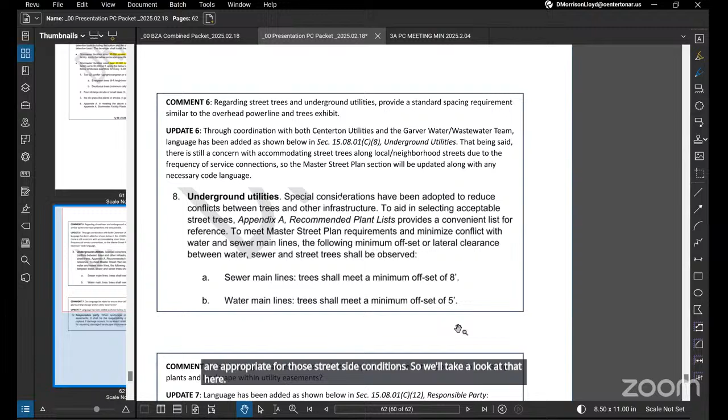Should we add that this is for collector and arterial streets? Yes, in other words, to not require them on local and neighborhood streets. Is that what you're getting at, Laureen? Yes, when we did the exhibit, we wanted to change it to collector and arterial streets for the street trees. Okay, so the concern there is that there's too high of a frequency of service connections on those local streets. The idea is that the master street plan section be updated to reflect what Laureen is referring to.

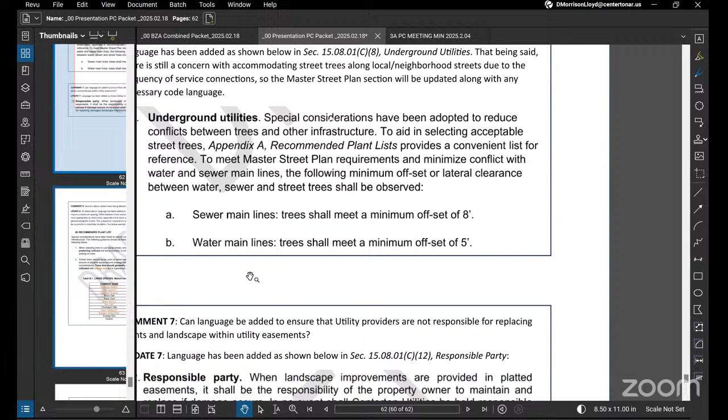What do the service line connections have to do with the tree spacing? Because this is called out for mains. Go ahead, Laureen, sorry.

Well, we ended up discussing the street trees along the subdivision streets. We're going to have to look at something else with the utilities because there's just not enough space to put a tree in with the mains and then all of their taps along with all the other utilities. There's only that one 5-foot section, but they're already having problems having to fix taps and the ball of the tree. Yeah, no, I understand, okay. I was just making sure I was following.

Yeah, so we're going to look at it. We have 2 ideas we're going to look at doing, either add an additional 5-foot setback in the front, or have a meeting with the franchise utilities and see if any of them would be interested in going in the back of the properties and freeing up another 5 feet in the front for trees. Then it would just be up to the property owners, you can get them in there before the franchise utilities get there. I'm just saying.

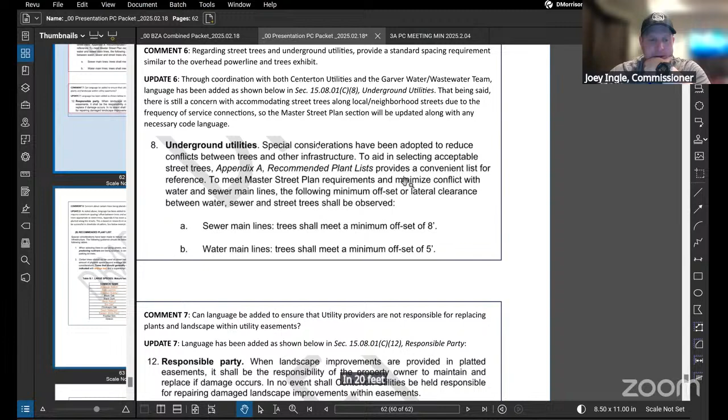Well, we don't have much room between gas. We have water, either water or sewer, gas, electric, and then all the communications. We have 3 different telecommunications going through, in 20 feet, so we're kind of tight. Oh, I understand. All right, thank you. Okay.

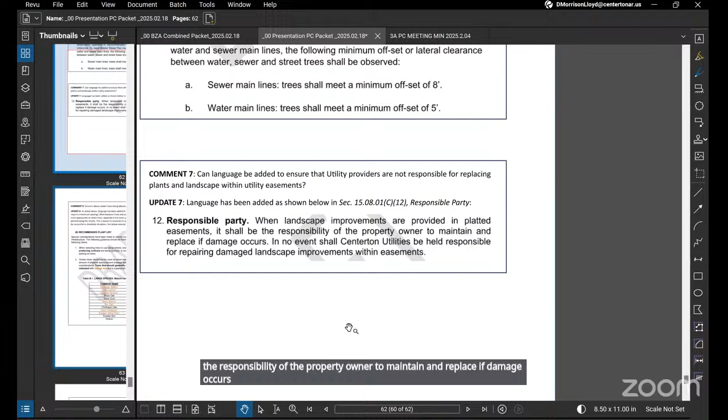With comment number 7, can language be added to ensure that utility providers are not responsible for replacing plants and landscape materials within the utility easements? We have added that in the landscape section 0801C12, responsible parties, and you can see there when landscape improvements are provided in platted easements, it's the responsibility of the property owner to maintain and replace if damage occurs. However, in no event is Centerton Utilities held responsible for repairing damaged landscape improvements within easements.

Would that not be better suited to be within their easement documentation? Just throwing out an idea. This was going along with the landscape part also, right, Derek? We just wanted it reiterated in the landscaping that if they put them in the utility easement, they are not responsible for them when they have to rip them out.

Part of that was we do want in the code, when a development is approved with a site plan and they have required landscape items, that when those die, the city can ask for those to be replaced within a certain time period. So when that was seen, there was a concern about making sure that if a utility is doing work in a utility easement, they don't get dinged as being responsible for that replacement in those situations. So that's kind of why it was requested to show up here in that landscape section. Okay.

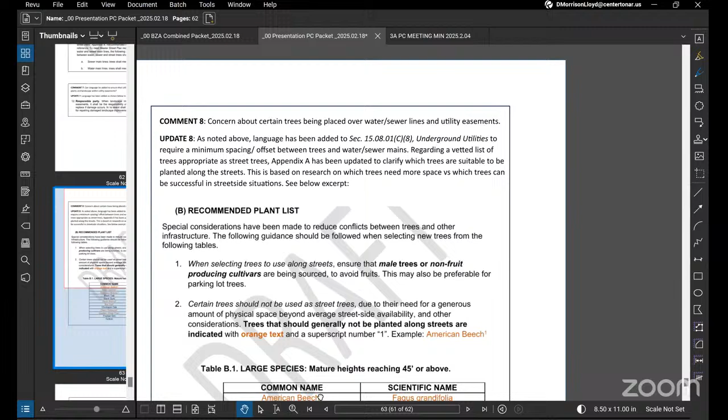Number 8, also from the utilities, concern about certain trees being placed over water and sewer lines and utility easements. We've kind of touched on that just a minute ago. So as noted above, language has been added to 0801C8 underground utilities that we just looked at, requiring those minimum offsets from those mains that we saw. Regarding a vetted list of trees appropriate for street trees, Appendix A has also been updated, clarifying which trees are suitable to be planted in those situations.

So you can see there's some new language here. Not only do we want to think about trees that are male or non-fruit-producing cultivars to avoid fruit droppings, there's also special research that's been done to look at trees that can still perform well as street trees but don't require as much generous physical space as some other species. So what we've done is taken these recommended tree lists, and if it's not appropriate as a street tree, it's going to have a superscript number 1, also in orange text. You can see there an example from a section of Appendix A, how that guidance is provided when people are putting their site plans together.

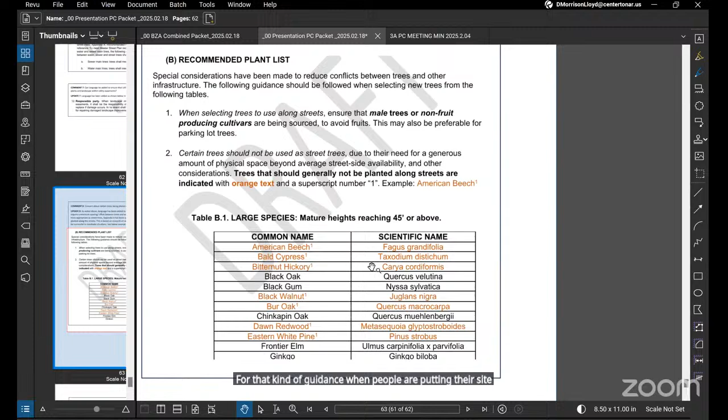Derek, I think it also needs to have the record—besides the record documents just being approved—they need the final record documents to actually be received. Just approved and received. Yes. Approved and received. Okay. Thank you.

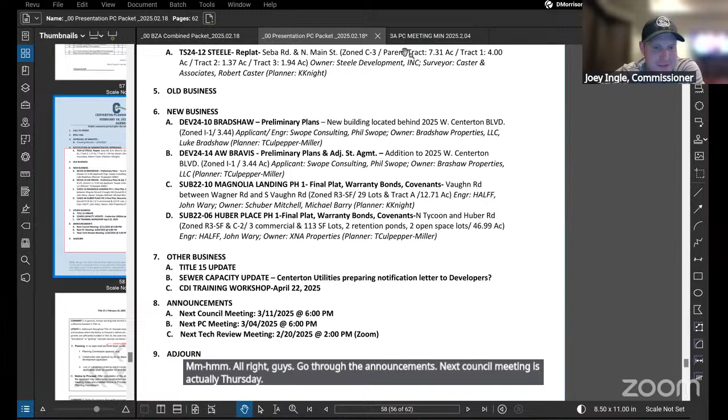All right guys, going through the announcements, next council meeting is actually Thursday. Next PC meeting is 3-4. Next tech review is also canceled.